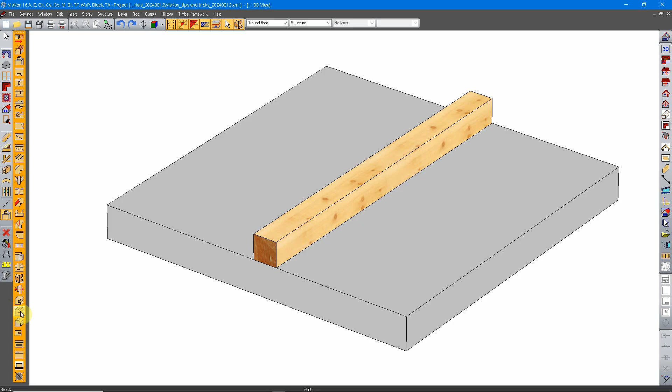By selecting this command you will have to select the component and the side which you want to put this notch. Let's say I want to be which edge? Maybe this edge. Okay.

We get this out, and now we have options to make it bigger or smaller. Make this notch bigger. Let's say I want it to be 10 centimeters wide and deep.

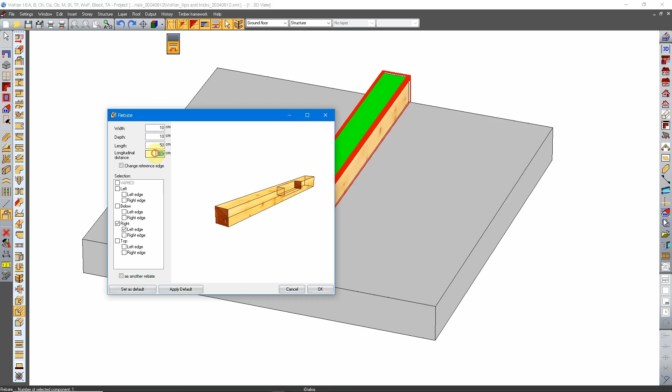I want this notch to be 50 centimeters long, and the position somewhere in the middle. I have a 2 meters long element here, so I will have to put it here. Yes, 75 centimeters, so it's in the right in the middle. As you can see, now I have a right angle cut in the middle of my 3D component.

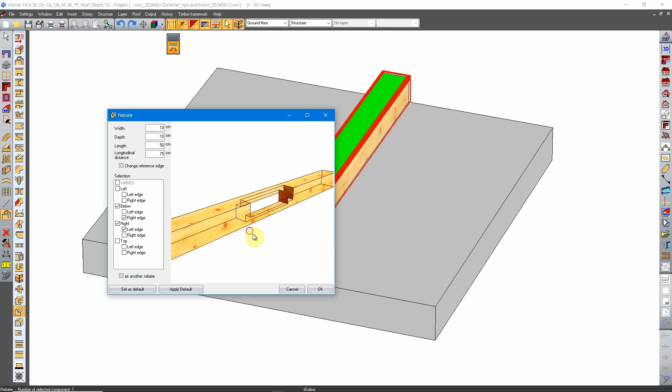Of course, if I want, I can always mirror my little notch on each side, and if I want to I can entirely cut through this piece. Let's leave it like this.

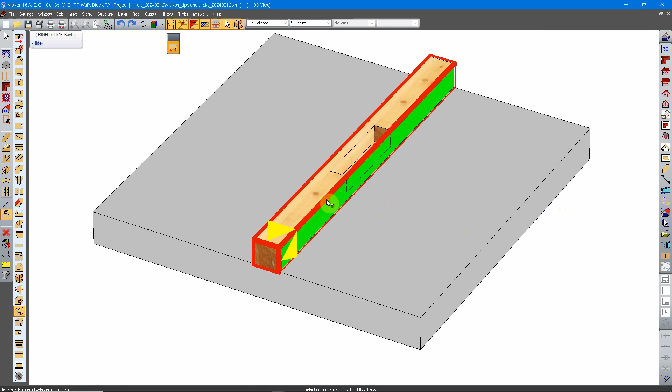Click OK, and now if I want, I can make another cut by checking this box as another rebate. And as you can see, my previous rebate is shown here, as well as our new cut.

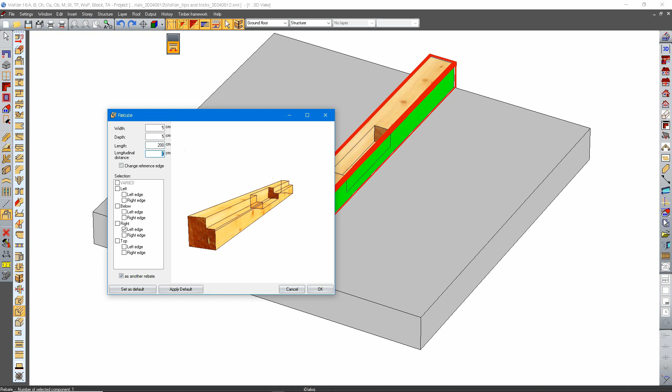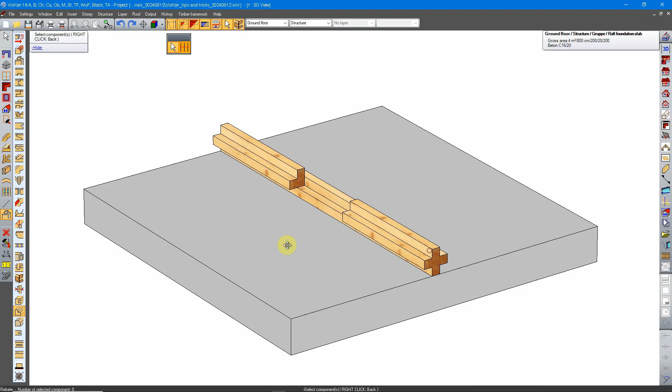Let's make this a little bit bigger too, and I want this groove to be longer, something like this. Yeah, and let's copy it to the other sides. And now we have this interesting shape.

And this is what you can make with the rebate command in VisKon 16. I hope that you will find this useful.